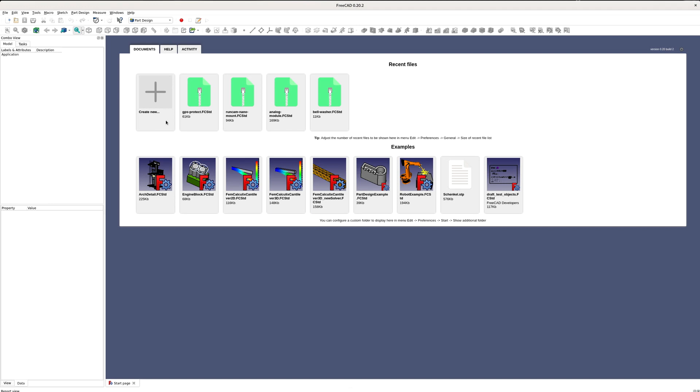Okay, so I'd like to share how to build 3D models using software like FreeCAD. I may not be following the proper way of building a model, but I'm able to build models. Okay. All right. So yeah, this is the workspace, and this is where all the resources or components are being shown. Everything that you are creating, this is the area where it's being displayed.

So the first thing that I usually do is the drop down. By default, it will default to Part. You have to be in Part Design. I'm not familiar with other stuff here. I've only used Part Design and, where's the other one? I couldn't remember. Sketcher, I've used that. There's another one that I use. Draft, that's the other one that I was using, especially when making my own custom text. Okay, let's select Part Design.

This is what I usually click. We create part, and then the next one is we create the body, and then the sketch inside the body. Okay, and then you'll be presented here with the axis, and I normally pick this one, but you can pick anything based on the model that you are creating. All right, so earlier we measured the dimensions of the TX800 VTX, as well as the thickness of the bottom plate of the iFlight XLS 5.1 frame.

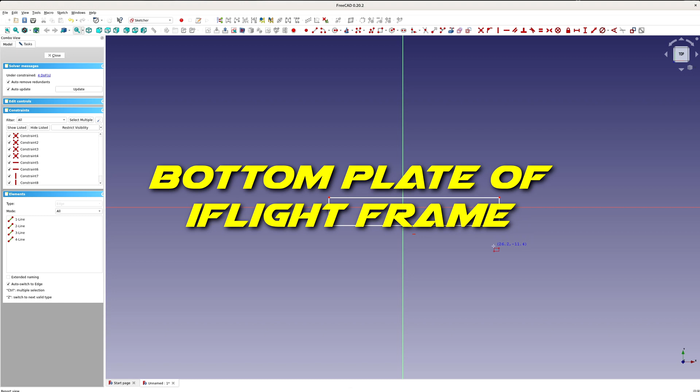And all right, so how I normally attack this is just random. I don't have any exact process. Whatever comes to my head, that's how I start. So I'm gonna build a rectangular hole. This is where the plate will be inserted, and the dimension of the plate is 2.5 millimeters. I'm remeasuring the thickness of the plate just to make sure I won't be wasting time. Yeah, it's 2.5 millimeters, and then the width of the plate, using my digital caliper, is 28.

Okay, so this is the inner hole, the inner surface. So again, like what I said, it's 2.5, so I'm gonna put 2.5 millimeters here, and then this one will be 28 millimeters. And then I'll zoom in on it, and most of the time I center it, by clicking the nodes outside and then the center, and then you click this.

And then the thickness of the TPU, I think 1 mm would be strong enough. Let's see, 1 millimeter. Yeah, I think that would be fine. I have samples here, this one is 2 millimeters. Maybe 1 millimeter is too thin. I'm currently holding a TPU washer that I made. It says 2 millimeters and it's thin. It's very light.

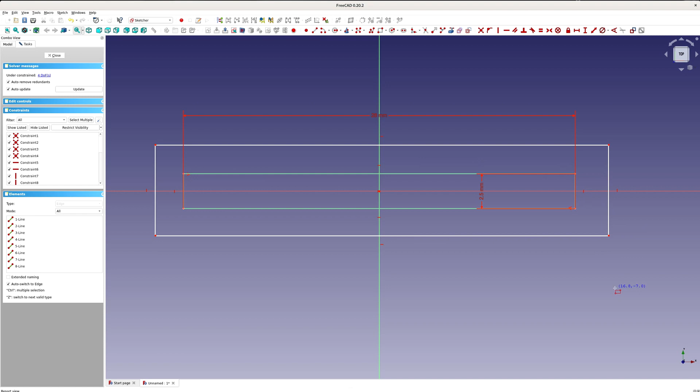I'm kind of worried about elasticity. I wanted to make it stretch because of something on the iFlight frame, which is why I was picking 1 millimeter. I can always use a heat blower to soften the TPU, and then I'll be able to insert this 28 millimeter clearance on a 30 millimeter wide plate. Okay, you know what, let's try 1.5 millimeters to make it a little stronger.

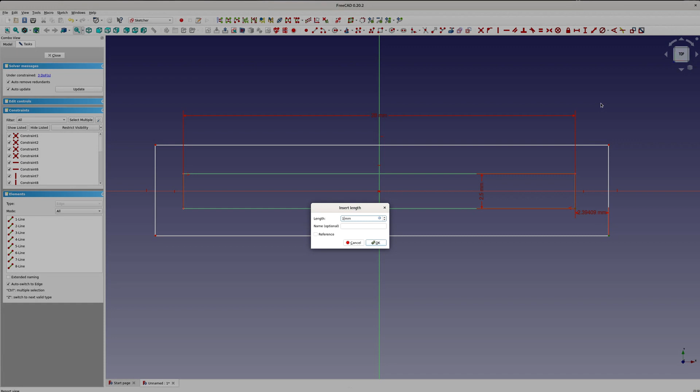So in order to put a 1.5 millimeter gap between these two, you select that node and that node, and then you click this. I'll put 1.5. And then this and this again for the bottom part. It's gonna be height 1.5. Okay, and then on the left side, you don't need to redo the height because we've already set up the height. What we need is the distance between these two lines here. So I'll click that and this. See the changes? Both nodes are now green. So I'm gonna select this and put 1.5.

Okay, what about the top part? Do we keep it as 1? This is where the VTX TX800 will actually be sitting. So 1 millimeter is, I guess, too thin. Maybe I'll put 2 millimeters. Let's see. I'm gonna look again at the washer. No, maybe 2.5. I'm gonna put 2.5 millimeters with an infill of maybe 40%, so that way it's not solid. 2.5. All right. I think it's not thick enough, but it's okay.

So next, we are gonna close it, and then I'm gonna extrude it, and I'm gonna measure how much width I will use for the mount. Okay, where's the drone? Here.

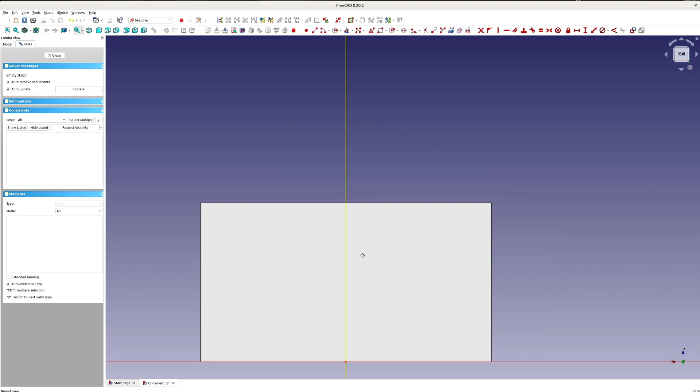So I'll click this. It's now selected, and we're going to create the sketch. I don't know if that's a bug. It vanishes. So what I usually do is close it, and then I double click this component here, sketch 1. All right. And then next we need to build the wall that I was saying.

What I'll be doing next is I'm going to measure the thickness of the TX800. And let's see. The thickness is around 6 millimeters. Okay, 6 millimeters. But before I do that, I will use this external geometry tool, and I'm gonna click some parts over here, the lines, the borders.

So that way, I'm telling the new object to adhere or attach or use the existing part or component. So I click that and I click this. You don't have to click everything, because what I'll be doing is I'm going to create a border, right? So I have to click this. So now you notice those 4 nodes, they're now clickable. If you don't do that, you won't be able to click the line.

Okay, I right click, and then next thing we need to do is to create a border. So yeah, I'm gonna use that rectangle tool here. Be careful, there are different choices there. I just picked the basic rectangle. So I hover the mouse and look at the green circle node, it changes color. When the color changes, it means your mouse pointer is on the proper position.

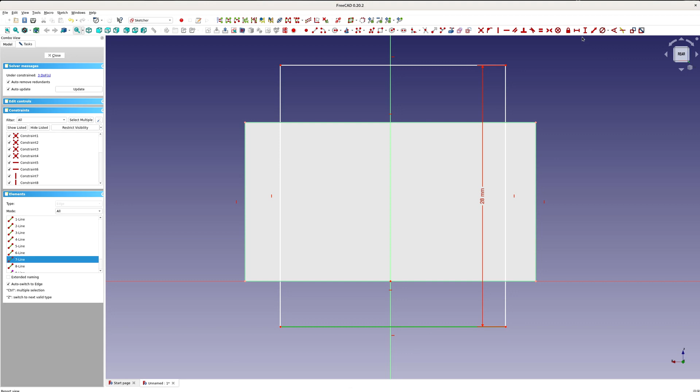We need to create a 28 by 28 square. Okay, and then that's the height. So you click this, see it's parallel, so you put 28. That's the height of the TX800 board, and this one should also be 28. Okay, and the next is to make this center. Click that again, see that green thing, click that, click this, and then click this to make it center. So 28 divided by 2, there you go. It's just math, right?

Okay, I don't know if this is wider than this. Maybe this is confusing me. No, I think they're the same width. I'm referring to this small rectangle area here. Next thing is we need to center this 28 in this to make it symmetrical or equal, so that the distance of this line here and this line are the same. You do that by doing some math. You click this and you click that, make sure it's green, then you click the height, and

1 second guys, sorry about that.

Alright guys, so the way to calculate this is by using math. Grab the width or the height or the dimension of the one that you're calculating, you divide it by 2, and then you minus it, and then grab the height of this, which I believe is 17 millimeters. We'll have to divide it by 2 again, and then the distance between these will become equal. There you go, it's 5.5. Yeah, so they're equal now.

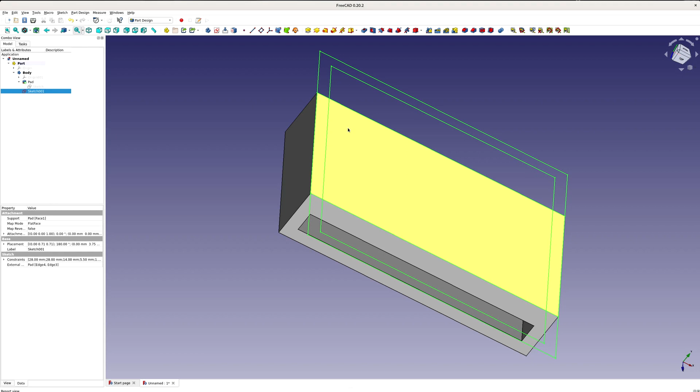Yeah, perfect. And so with these and these, the height should be 1.5. Okay, perfect. And then these and these, height 1.5. Okay, looks good to me. Now we can close it. And then let us measure again the thickness of the TX800. I think it's 6 millimeters, right? Yeah, let's see. Oh, my memory is so bad. But I remember it's 6 millimeters. Yeah, 6 millimeters. To be exact, it's 5.5, but I'll use 6 millimeters. So the padding we will use is 6 millimeters.

Oh, how come it didn't work? Why? It didn't work. Oh, because of that line. That's the culprit. So I forgot. If you have lines like this, it's bad. So we have to delete it. To delete it, this is the tool you use. Delete that. Delete that. Delete that. Delete that. Now, if we do this, I think it's still gonna fail.

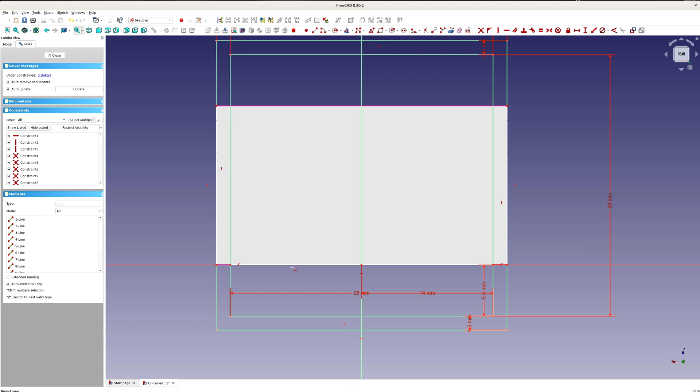You know what? Let's delete the lines that we added earlier. I knew we would have an issue. Oh, yeah, this one as well. We should delete that. All right, now it's all green, right? We deleted the first rectangle that I created. All right, we're gonna close now. The padding should work. Perfect. And then the height of the TX800 is 5.5, but we're gonna use 6, because sometimes with printers, we're not sure if it's correct or not.

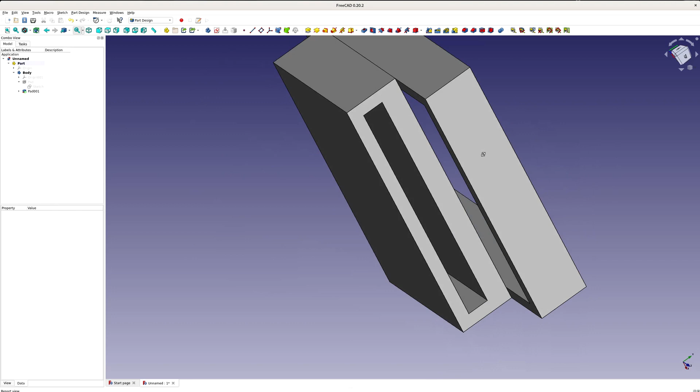Oh crap, I forgot one thing. Although it's not a problem, this can be used as an air intake. Yeah, I think that would be good. I'm gonna put an opening here later, so that the bottom part of the TX800 will get some air. I'll do that later.

So I was talking about putting a Crossfire Nano support here. This is what I'm thinking of doing. I'm gonna measure the thickness of the Nano RX, the Crossfire Nano RX. I'll make 2 here, and then I'll insert it, or I'll just extend a rectangle over here from here to here, right? That will still allow me to insert the TX800 around this area.

When I do that, the TX800 will be protected by that section, right? You know what? I'll do it now because I know it's hard to describe. But first, I'm gonna measure the width of the TBS Crossfire Nano RX. So the width is about 12 millimeters, and I'll make it 10, so that way the side of the RX Nano can still be secured properly by a zip tie. All right, let's do that.

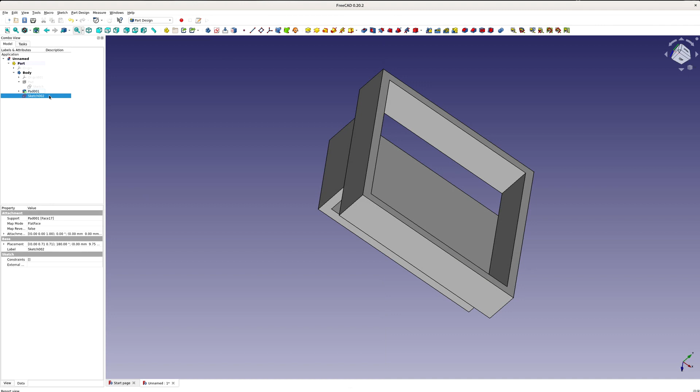I'm gonna click this part, and then we will create a new sketch. I think this is a bug in FreeCAD, which vanishes that thing, right? So we'll make use of this to set this as a geometry. What is this called again? External geometry. Create an edge link to an external geometry. Again, the width of the Crossfire Nano RX is 12 millimeters. I'm just going to make it 10 millimeters. So from there up to right here.

And then that's now connected to this line. So even if I drag it somewhere, it wouldn't go out. It's just gonna keep moving in that direction, stuck or connected. Like I said, the width is 12, but I'm gonna use 10 millimeters, and the center of that would be 5. 10 divided by 2 is 5. I just want to center this rectangle, so we'll put 5. This is where we will put the Crossfire Nano RX.

Later, once we print it, I'm going to put hot glue here, or most likely the other one. Let's see. Oh, this is not E6000 anymore. It's Gorilla Fabric Glue, but it's still okay. This is also strong. It's as strong as E6000. That would be good enough.

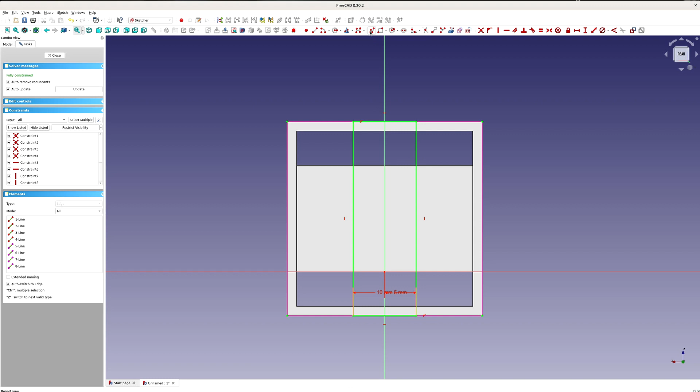I'm gonna make some geometry here, and then we'll use a different tool this time. We're going to use this one instead, because I want to create a non-rectangular shape, which is, I think it's called trapezoid. I couldn't remember anymore if it's trapezoid or rhomboid. I think it's trapezoid. So how come I cannot, what's going on? Did I click it? Oh, I did not click this button.

So first I'm gonna start right there. I'm gonna click, single click. See, it's color yellow, right? Single click, and then this. Watch it. This is currently diagonal, right? But I'm gonna slowly make it parallel to the line, and you'll see a symbol will show up. There you go. See that thing? It is telling us that it's now parallel to the other line on the left. So I'll click that there, and then click this again, and then I'm gonna close the gap to make it a perfect trapezoid. All right.

Okay, so now I just right click outside of the object, so we can pick another tool. Maybe I should set this to size 10 as well. Let's set it to size 10. Okay, size 10, not bad. And then this is definitely not centered, right? See, we need to put some constraints. We can pick like angle between these two, and we will make this angle equal to that one. But for now, let's make it centered.

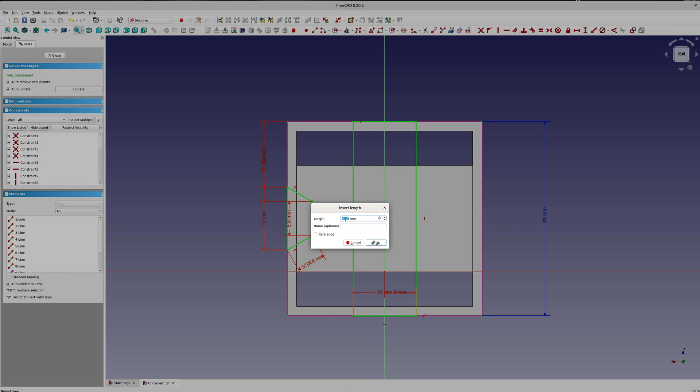So look what happens. I can just pick a length that I want, something that will look pleasing to my eyes. I think this length is good enough, so I'm gonna select that. This time we're going to use a different measuring tool, constraint distance. It's not parallel, it's not vertical, so you use this tool. So that would be 4.57. I don't like odd looking numbers, so 4.5 would be okay. Yep, there you go. So we have built this one, right? And now we have a guide on how much we will set this on the new one that we will be adding.

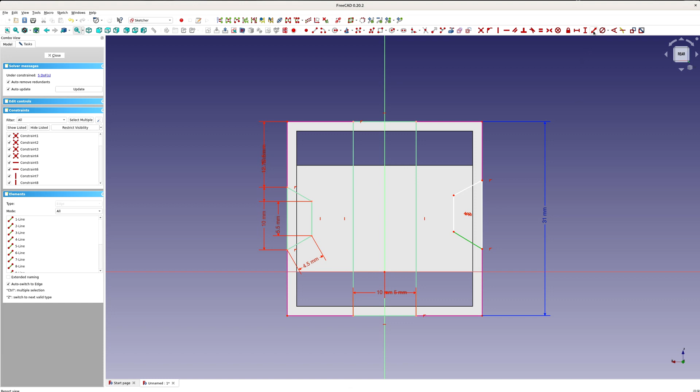So again, we'll click this tool, and then we'll create another trapezoid. You can just randomly click it. See? There you go. So now you're gonna ask me, Neil, this one is not parallel. How do you fix that? Sure, we can click this, select the line that you want this to become parallel to, and then this is the tool that you'll be using. There you go. Now it's parallel, right? And then next, you can pick any side that you want to fix. I'll fix this as 4.5. Okay.

And then now we can do the same stuff again, but I have another idea. I'm gonna teach you a different solution. You can select this. This one is locked now. I cannot move this anymore. I can, even if it's not gonna move. But this one, since it's still not constrained, I can still move it. So you can do it this way.

Select that and select this. Is it selected? The green? Yeah, I think it's selected. Oh, yeah, let's do it again. It's color orange, right? Or pink. So I'm gonna select that. Select this. Okay. Now you want to tell FreeCAD, hey, I want this to become like same level, same line. So there's a tool for that, and I think the tool is this one. Constrain horizontally. Bam. All right.

You can do the same thing for this. Before we do that, we can change this to 5.5. Let's change the length. 5.5. And then this. Let's do a horizontal constraint. Horizontal constraint. Okay. And then what else? I think this one is still not constrained because we can move it. Yeah, I was right. Okay. Let's do that. I'm gonna select this and then select this one, and we'll do another horizontal constraint. Bam, done.

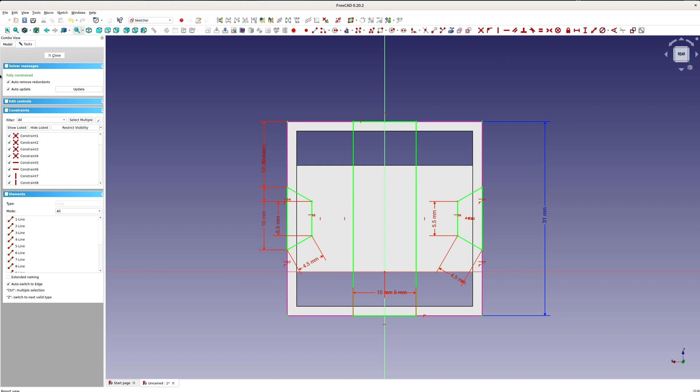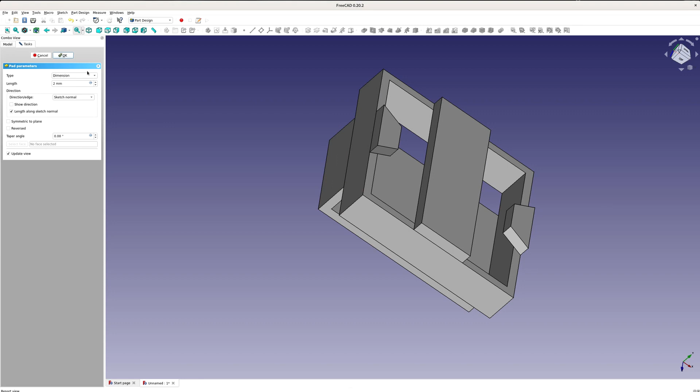All right. Now let's click close, and we are going to do a padding, and I am thinking of putting a padding of, I think 2 millimeters is good enough. So again, underneath this is where we will put the TX800. Yeah, perfect. Okay. And this is where we will put the glue, and then the Crossfire Nano RX. And then after we've glued it, we are going to put 2 zip ties right here to make it secure. And what else? Maybe I can extend this and then extend it there. No, it's just gonna add weight. All right, I think that's good enough.

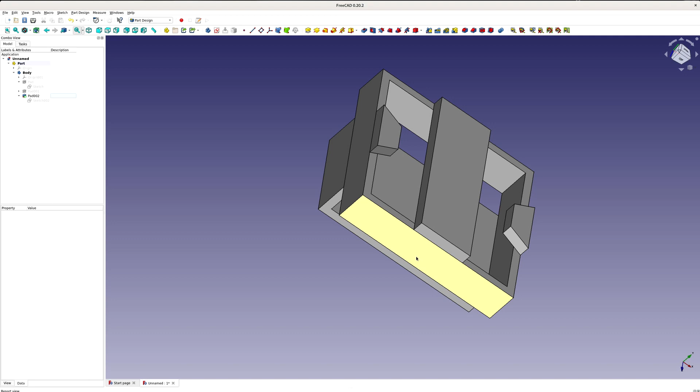All right, so what's next? Looking at the VTX now, there are 2 connectors. We have to make 2 openings for these 2 connectors. One is for the UFL, and the other one is for the JST. So we have to put a hole here and right here. Right here, okay? So let's see, it's somewhere at the bottom. I'm gonna use my caliper again.

The width that I must put for the connector is 9 millimeters. Okay, I'm gonna measure the real JST connector because I'm not sure if 9 millimeters is enough. Okay, let's see. Oh, the JST connector is just 7 millimeters wide. So 9 would be perfect. 9 millimeters for the hole, okay? Where is it? And then for the height, I don't know if I should make a full one. I think it's okay. Yeah.

If I make an opening at the bottom, will it make it weak? Because this is 10 millimeters, right? Let's see the distance. That's 6 millimeters, yeah. And then I put 2, and then this, what's the size? That's about 1 millimeter from the top, right there. 1 millimeter, so I can make a hole right there. 9 millimeters. Okay. So this will be a little elevated, which is okay. You know what? Let's see how it's gonna look. I'm just worried about the strength, the durability of this TPU. I think I should not worry about it, quite honestly. Okay.

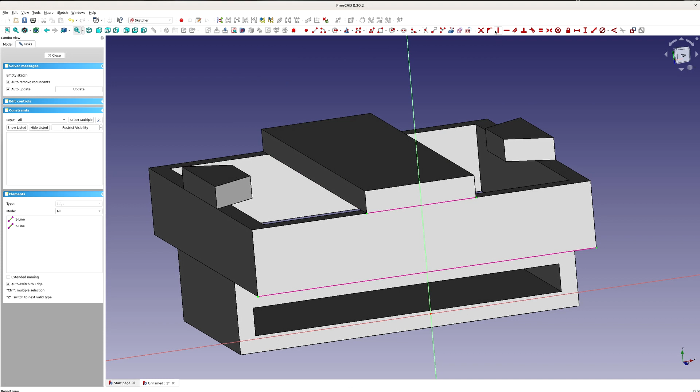I double click that, and then we want to add a hole there, a rectangular hole. So I'm gonna click this. I'm gonna click this. Okay, I'm sure it's hard to understand, right? So I'm gonna move it, and then let us measure the total height of the female JST connector. So right now it's showing me 4 millimeters. What about the real JST connector? Let's see. Oh, it's even shorter. It's 3. So 4 would be good enough. So let's make a 4 mm high hole. Where's that rectangle? Okay.

So let's click this top so it's facing us again, and then I said 4 mm, right? So click that and then change the size to 4. So I'm kind of worried that it might make it too thin. We'll see. We'll find out. I said 9, right? So that's the hole for the JST connector. So if I do it there, see that part over here? I don't know if it's gonna affect the strength. If I bring it down here, that makes this thing strong, and this one, I don't know. I said 1 mm from top. So we have to do that. 1 mm from top.

Okay, and then the bottom part. So if I do that, this is the only piece I'm worried about. This thing, yeah, this top. Making this thicker won't actually help.

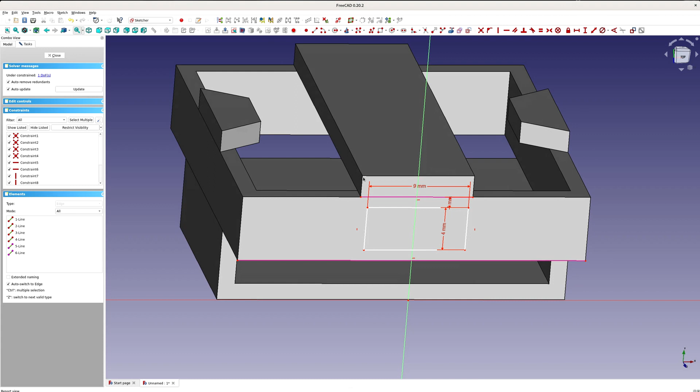And then this part, I'm not worried about the lower part. I don't care if this part breaks, that's normal. You know what we'll do? Let's add a part here so it will make it a little strong. This will add support for this area. Yeah, this part. Okay, let's do that.

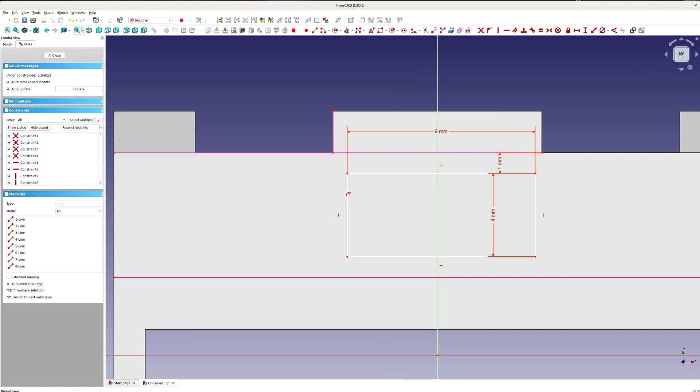So I'm going to use this tool again. We'll click that, we'll click this, and then click top so it's flat, and then we will zoom in and make use of this tool. Okay, I'm clicking the corner, and then corner here, and then I'm gonna pick some distance. Maybe this is just 3 mm, and then close it.

All right, let's see. So, oh, you know what? We can't do that because here I want a pad, but this one I want... what's this tool called? Oh, it's not shown. So let's undo this, Control Z.

Yeah, okay, that's it, let's close it. We'll do it later, we'll make a hole first. So to make a hole, we will use this tool instead of this one, which is the padding. This one is making a pocket. Okay, that's it.

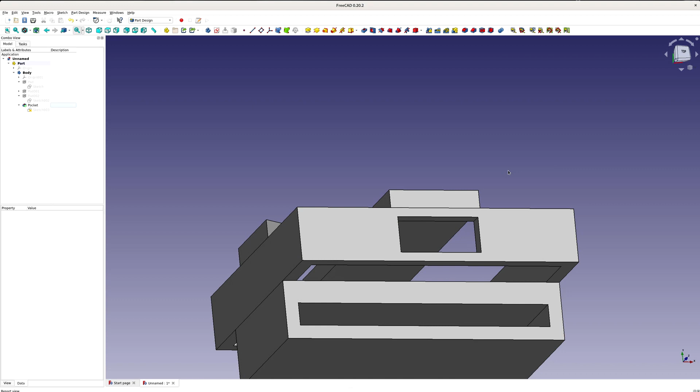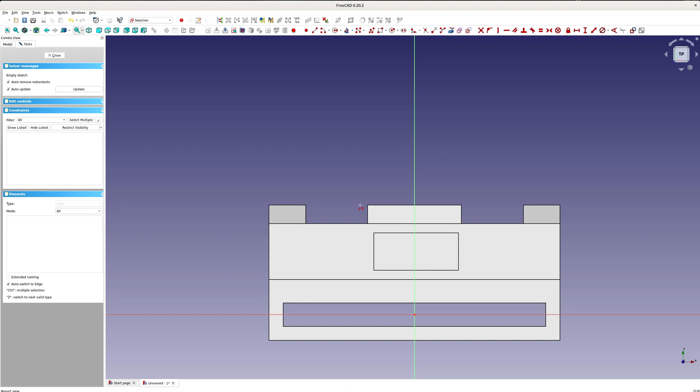Okay, now we are going to add support because this part is really weak, trust me. So we'll make it a little thicker. Let's click this, either this one or this, doesn't matter, and then we'll create a new sketch. Okay, a FreeCAD bug. Double click sketch 4, and then we will use this so we can select this thing and this thing, and then we'll zoom in, and we will use this tool to create a triangle. After we've created a triangle, we will pad it.

All right, so let's see the current length of this one. So I selected that line, and then I'm gonna select this. So that's about 3 millimeters. How wide is that? 3 millimeters. Doesn't matter, you know what, even if I put 4, this part, this area up to this area won't change a lot. So I'll just pick 3.

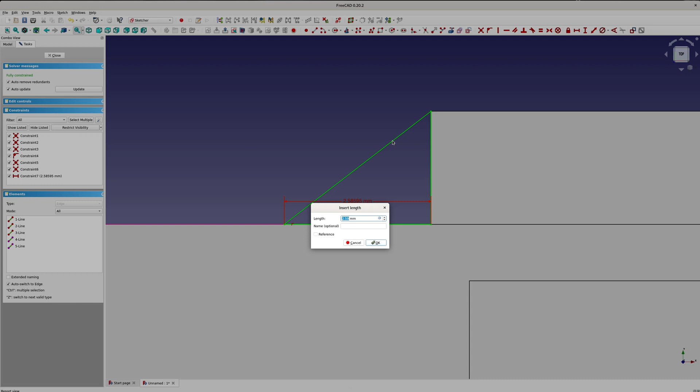Okay, let's do the other side. Let's do this again, the geometry, select. And then this tool will make a triangle. And then this one, right click on the area and then select the line and click this. 3. All right, we're done. Let's see, is it the same? Yeah, we're the same, it's the same.

So next, we'll have to do that on the other side as well. We will see. Oh no, we don't have to, because the other hole that we will make is small, it's a circle, it's for the UFL connector. So the next thing I need to do is to extend this, make a pad so that it's as thick as this one.

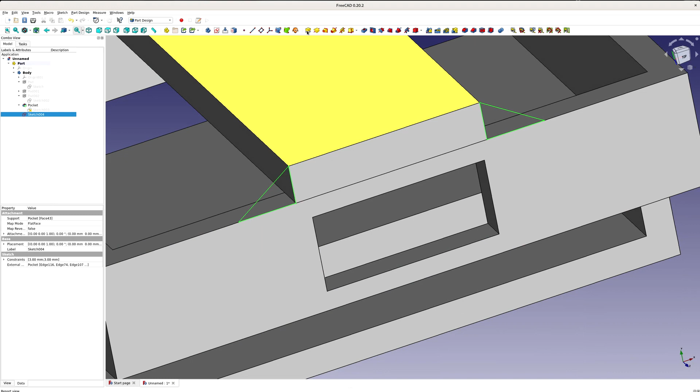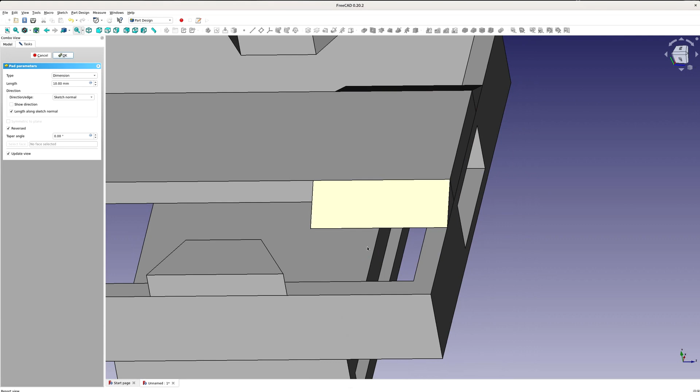Oh, why didn't it work? What happened? Oh, I have to reverse it because it's going towards here. So you have to click reverse. There you go. And then, so what's the width of this? What's the width of this? You can do that by showing this surface, right, and then changing the dimension to 'up to face'. When you click up to face, the next thing you need to do is just click this surface. See?

Perfect. Now, what we just did is we added support for this thin area, so that's a little stronger now. Okay, let's control save because I have not saved this work. I have not. Yeah, this is gonna be the first time saving a TX800 mount.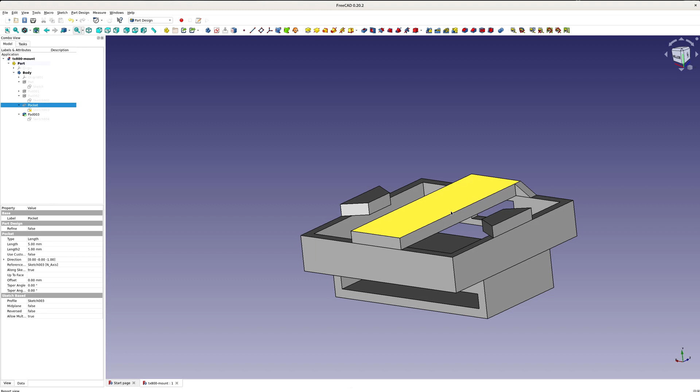Okay, now we'll make a hole for the UFL connector. So I'm gonna measure it again using my caliper. But where is the TX800? Okay, it's right here. So the top part from the bottom, from the top part of the UFL, is about 2 millimeters, and then opening at the bottom. Yeah, it's okay, doesn't matter. So where are we? We are going to make it here, we'll create a hole here. All right, oh, the width of the hole, that would be...

We can use 6 millimeters this time. Okay, so let's click this to create a new sketch. Close.

You know what? I should reach out to the FreeCAD developers and bring that up to them. What's going on here? Is this the other way? Yeah, okay, we will reverse it. I don't know why it did that.

So now let's click bottom, and then we will select this tool again. This and this, I think that's what we need. And then we will create - I don't know if we should create a circle this time because it's a circle. No, I'm gonna use a rectangle. And then I said the width is 6, right?

Yeah, 6. What about the height? The height would be 4, or let's do this - I said 2 millimeters from top.

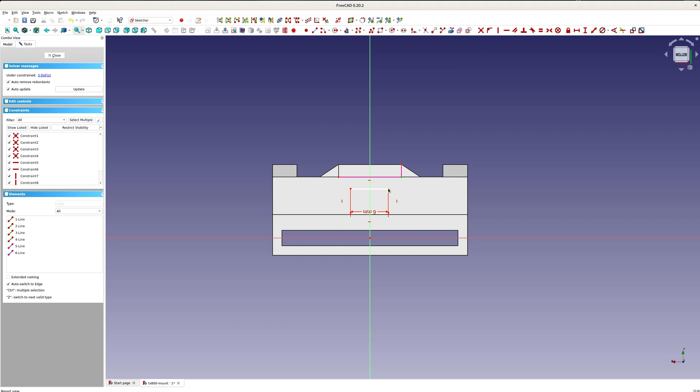Two. Oh my God, it looks like I didn't measure the center earlier. Did I? Yeah, I didn't measure, damn it. See, I forgot, it's not centered. Jeez, damn it, see? Oh my God. I'll fix it later, I forgot about that.

Okay, yeah, I noticed when I was doing this. Oh, my mouse is annoying. So 6 divided by 2 is 3. Okay, that guy is centered, and this one is 2. And then...

I think it's okay, so we can make it wider. Yeah, because we're just making a hole. I don't need to measure it because I don't want that thing left there, so we're going to put a cavity as well. But this is centered now.

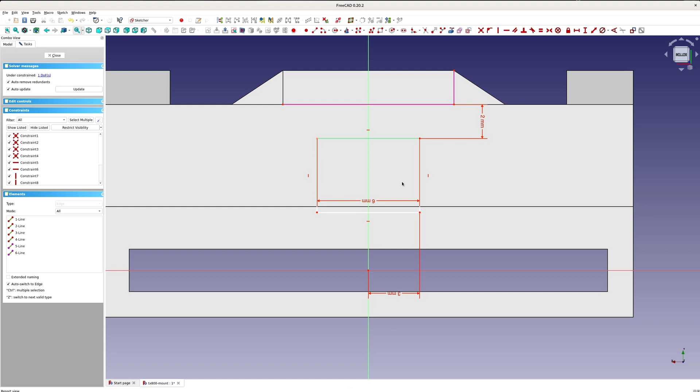That's 2 millimeters, okay, let's close it, and then you'll see what I'm trying to describe. There you go, that's what I was trying to describe. I don't need the bottom part - this is for the UFL.

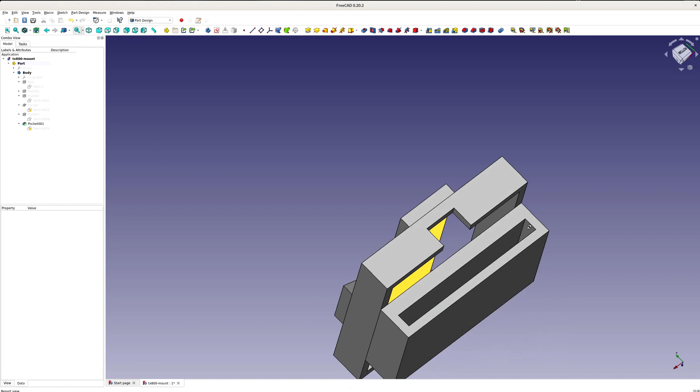Okay, I think we are done. Yeah, I think we're done. I'm gonna put some holes here because I think I'll have a very hard time inserting this part into the iFlight frame due to something - there's a protruding thing on the side, so I'm gonna make a hole.

Let's see. I think this is good enough. Yeah, it's gonna be hard to print though, there's tons of support. Yeah, maybe if I do it this way.

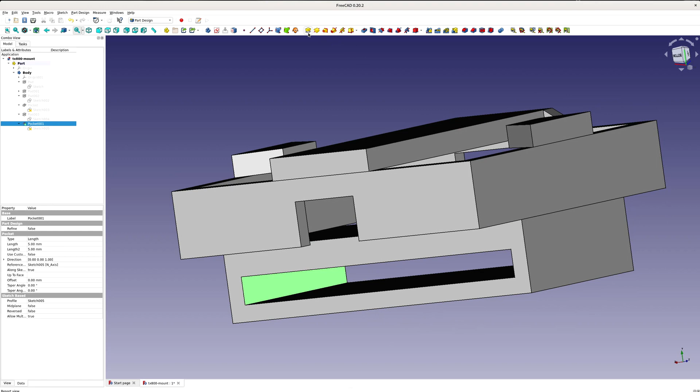You know what, let's build the hole now. I'm gonna build a hole on this side, so I'm gonna click this. Gonna click this - where's that new create sketch? All right, that's that annoying bug.

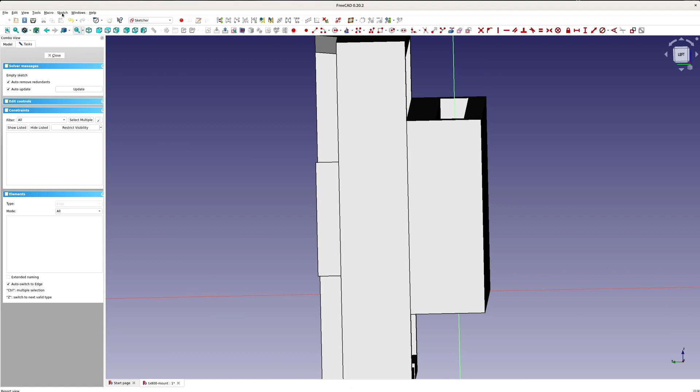Now it's like that, and you cannot see because it's the inside, right? In order to work on that thing, you'll have to click sketch and then view section. Look what happened, see? Now we have access to the inside. So let's make it flat by clicking left, and then let's rotate it.

I want to make a hole here. The width of this, if you remember, is 17, so we'll make use of this geometry again. And then we will create a rectangle.

All right, this area will become a cavity, an opening. So you don't want this part to be so thin that it will - what's that word - compromise the strength of the bottom part, the one where you will insert the bottom plate. So let's take a look at the distance of this from this. I don't know.

So that's about - oh, how come it's 0? Oh, because we rotated it. So that's what happens when you rotate and click the wrong tool. Let me do it again.

Click that, and then we will click this. I know it's this one, right, because we rotated it. So 3 millimeters, that's too thin. Maybe 5, let's see if 5 is strong enough. And think about severe crashes - yeah, 5 may be strong enough.

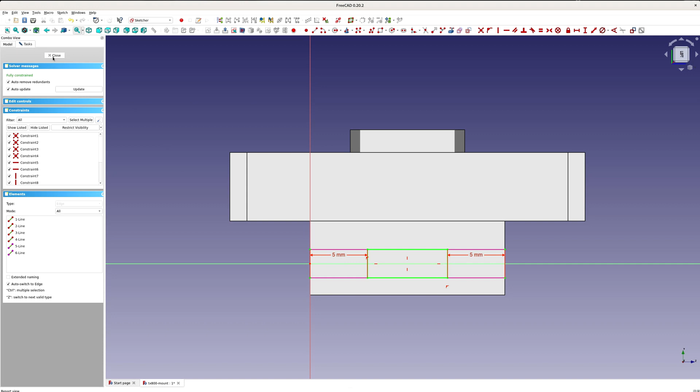Okay, so now we can make a hole there and here in one swing by doing this. We'll have to click 2 dimensions - 2 dimensions, right? So I think this one, the lower one, is for this one. So the width is 28. Let's try 30 here, let's put 30 or 35 just to make sure.

There you go, see this? Yep. Okay, I think we're done. Okay. Yeah, we're done.

We can just make it a little aesthetic, so let's click the corners and we'll make it aesthetically pleasing. Maybe 1.5 - oops, too much. 1.25, there you go. And then this one, I like this to be rounded.

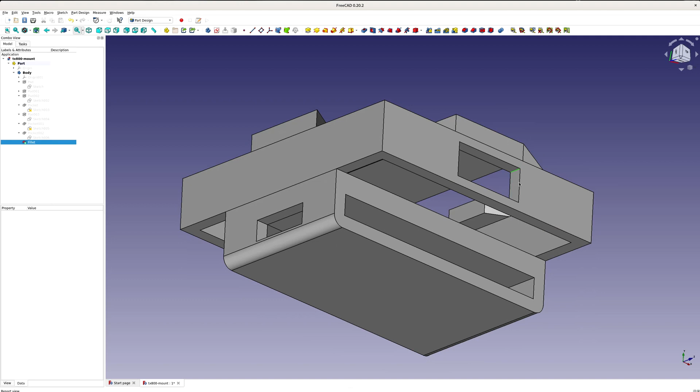Okay, I'm holding the control so that I can select more lines. Oops, what happened? Okay.

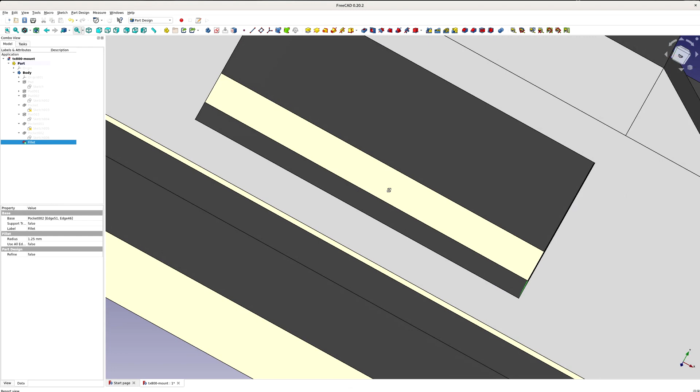And then zoom out. We've selected all four corners, and then we'll click this tool again, which is the fillet. Yeah, it makes it like that. Maybe 1.5. I think it's good. Yeah, it also made it even stronger there, right?

And then this part, I want this a little soft. Let's make it maybe 3. Yeah, that's good. Click save.

Okay, and then looking at the TX800, the corners are rounded, big rounded corners. So we'll put 4, I guess. Let's see.

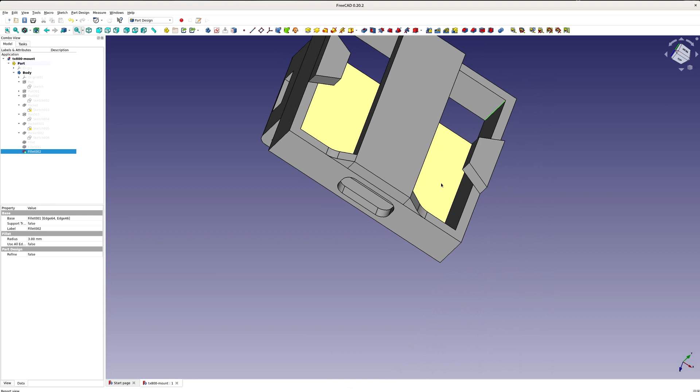Okay, zoom out. Rotate, hold the control key. Oh, did I click it? Oh, I clicked the wrong one. There you go. Okay, there you go.

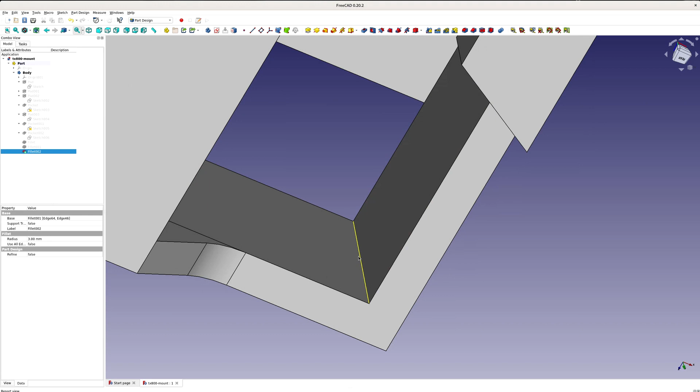Zoom in. I'm having a hard time clicking the line. Okay, zoom out and drag, and then last one here. Zoom in, hold the control key. Okay, zoom out, and then click this.

I think 4 would look great here. Yeah, 4. So that's the shape of the TX800. And especially it's just 1.5 millimeters, so it's elastic, it's TPU.

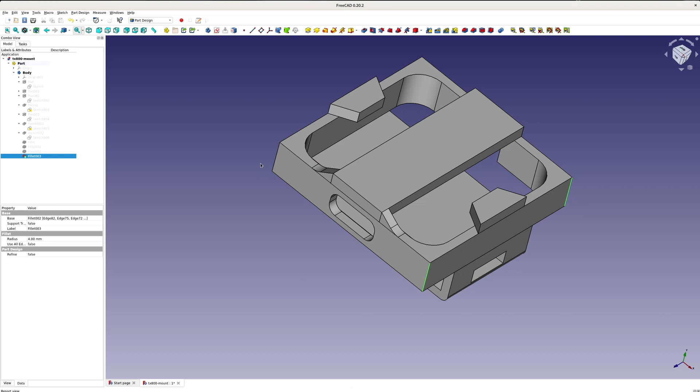Okay, and then corners, this looks ugly, so we'll do the same thing, but I guess I'm gonna use 3 only, so it's not too thin.

Zoom in, and then fillet, put 3. There you go, that looks nice. Yeah, that makes it still strong.

It's thick. Yeah, what if we put 4? Let's see. I don't know. It will be less TPU filament that will be used. Okay, I'll use 4.

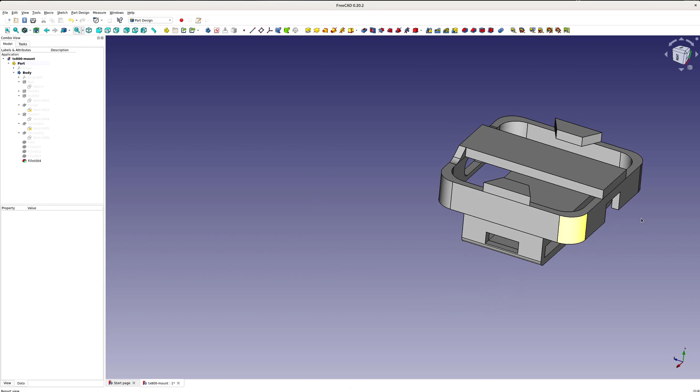Now let's go right here. Now this is for the UFL. We will put maybe 2 here. Zoom in.

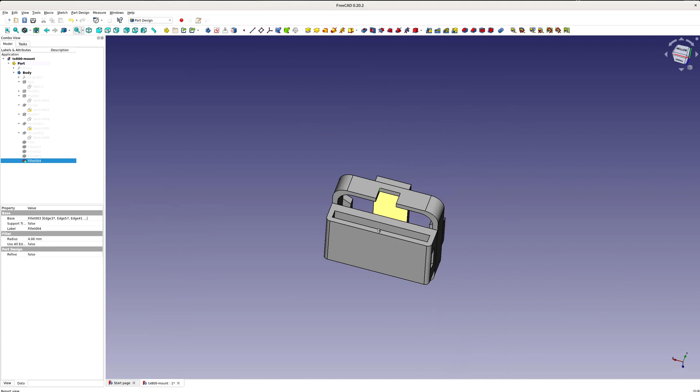Okay, zoom out. And then that thing again. Let's try 2. Yeah, looks good.

And then I hate sharp corners, so let's change this to 2 maybe. Oh, it didn't work. Oh, you don't have to select that. What about 1.5? 1.5. Yeah, looks nicer. Okay, and then

Maybe this. What about 2? 1.5. Right, there you go. It's looking nicer now.

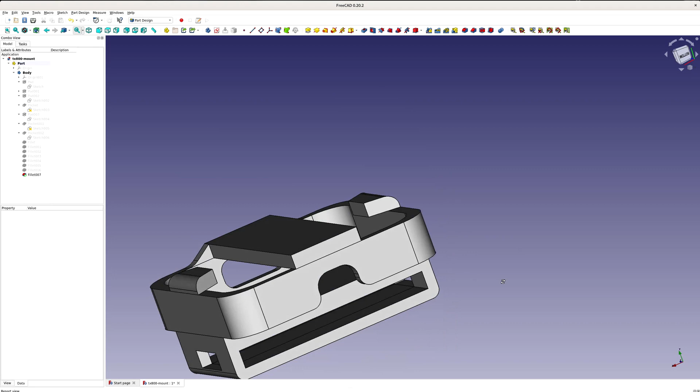Yeah, I think we're good. I think we're done.

Okay, so again, we will put the glue here, and then we will mount the crossfire here, and then what's next? Zip tie. And what else?

The VTX would be secured. I don't know if we have to. You know what? The TX800 will be secured because of this part. Yeah, plus this 2 here. It will prevent it from flying.

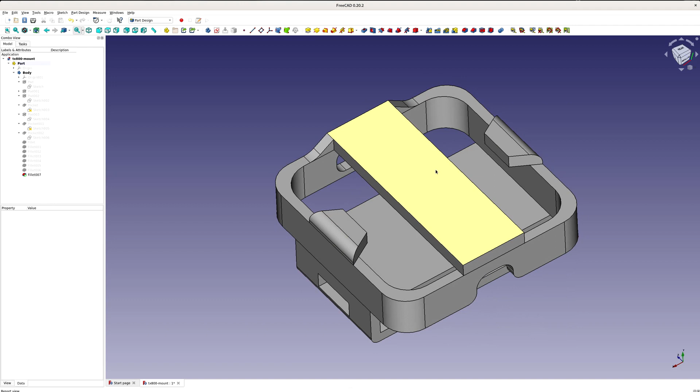Yeah, I'm pretty sure. If I'm anal, you know what I'm gonna do? I can put glue here on this yellow part. That won't fly anymore for sure. Yeah, I can do that as well.

Yeah, I think it looks great. Maybe.

This, do we need? I don't know. You know what? No, we don't. It's just a waste of TPU. We're just adding space. If I add this to here, no, it's not a good idea.

I think we're good. Oh, let's press Control S. All right, perfect. Yeah, I really like it.

Do you guys see anything? Oh, what's that hole? Oh, just for me to be able to, because of that thing, I think it's for the 30-30 holes. That's why there's a protruding thing in that iFlight plate. Yeah, this will just allow me to be able to extend this part.

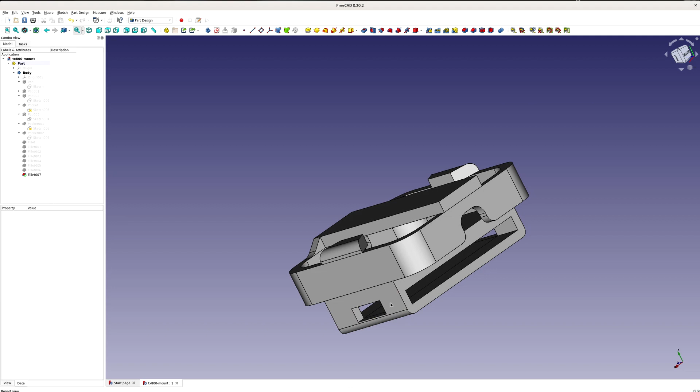Yes, or stretch, the proper word is stretch. Yeah, I'll do that. All right, guys.

What the next thing that we need to do is we need to save and then press Control A, and then we will export this as an STL file.

Oh, it's already in STL. And then I'm gonna put TX800 mount STL. Yeah, those are all the things that I was working on.

All right, save. That's done, it's already saved.

Okay, the next software that we need to use is Cura or Cura. All right, guys, let's start Cura.

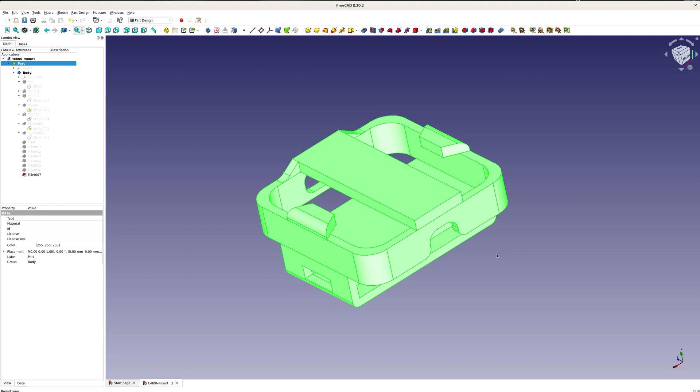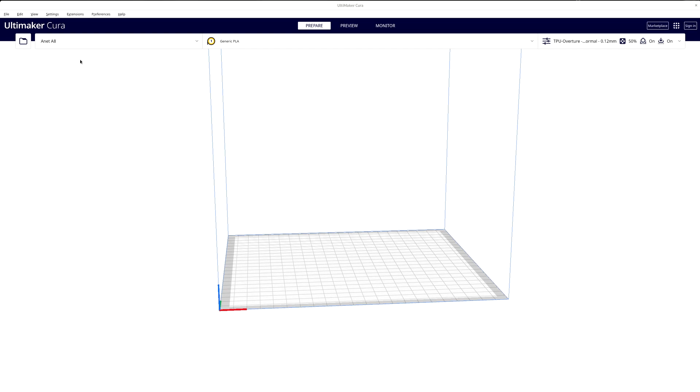All right, guys, we are now going to generate a file that is going to be compatible with our 3D printers. And the tool I use is called Ultimaker Cura, or Cura. And if you remember, I created or exported the mount that I built in FreeCAD as an STL file.

And yeah, this is it. Okay, so that's the mount. I'm just rotating it. Okay.

And now you have to think about, like, when you print models, you have to think in such a way that if I mount it this way, if I print it this way, will it be strong? So that's how you think. That's what you do before you print something.

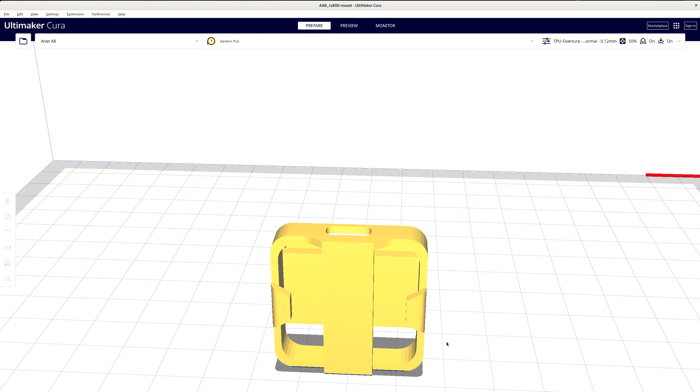And then also, if I put the object in this orientation, how much filament will I actually use? So right now, if you see red, that means Ultimaker Cura is going to add support to be able to print that section.

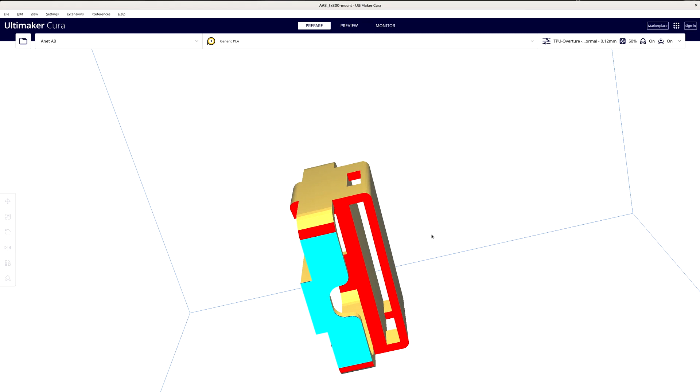So if I see how much I'm gonna be adding, that means I cannot print this way. I mean, I'll be able to print it this way. I'll have a very nice hole, which I like, but I will have to add support. You'll see it once I slice it. So that one will have an extra TPU because it will have to add support to be able to print

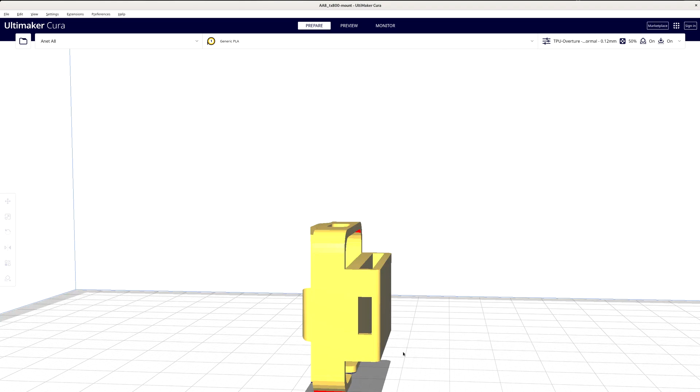this part. Yeah, so now this kind of orientation is really nice for the hole. It's gonna be clean. There won't be any support because the way the printer works is layer by layer. So you know what? I'm gonna slice it so you can see how it's gonna print it. So slicing it will tell you how a model will get printed, right? And this slider will tell you each layer.

See that part, that color cyan? It's the support in order to be able to print that area. If you don't, it's gonna sag and it won't print properly. That's why you have to do it. There are certain angles that you don't need support. So that's what's called slicing.

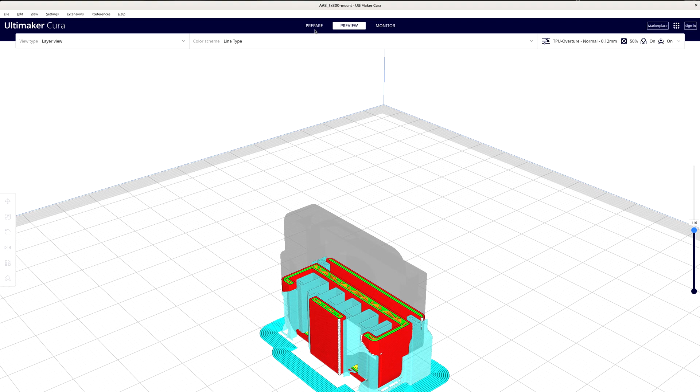All right, so how many grams will I be wasting if I do this kind of orientation? I'll be using 7 grams right there, and it'll take about an hour and 36 minutes. What if we change the orientation? Let's do that. So let's go back to prepare, and then click the model, click this, and then what if I rotate it?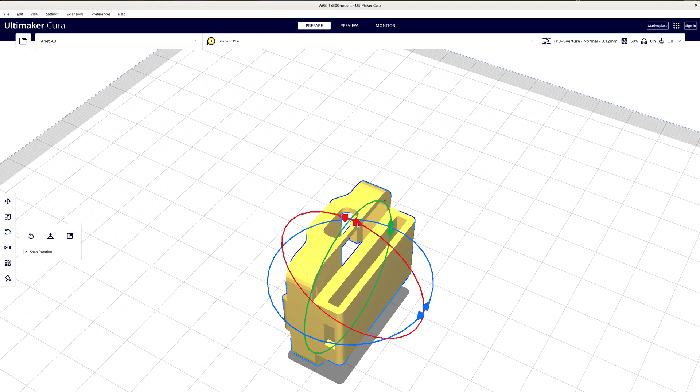What if I do this as the flat side facing the bed? This is called the bed. You can use the rotate tool, or the quickest way is by selecting this area. Select the surface, and then which part of the model you want to use as the surface facing the bed. I just click this. There you go.

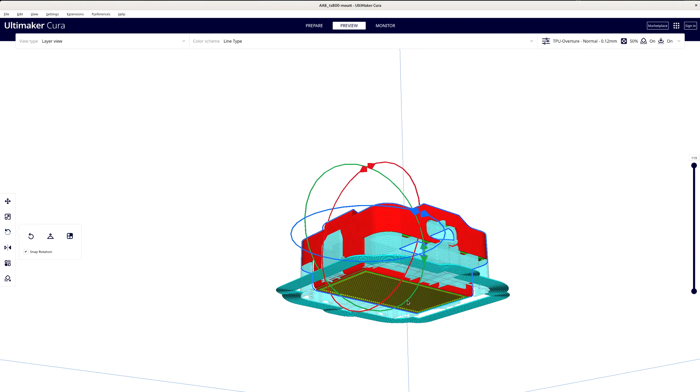Now if you do it this way, look what's gonna happen. I am worried about the support. I click preview. See? Look at that. So especially the hole where the bottom plate is going to enter, that will have tons of support. It's gonna be hard to clean. And I use pliers to pull this stuff.

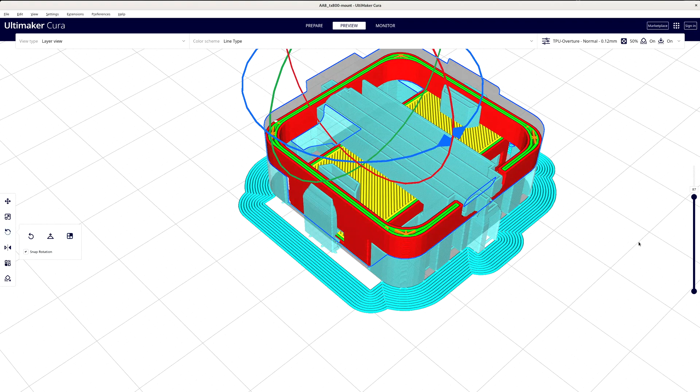Let me show you what I'm talking about. See? Oh, not that part yet. See, that's the support, the cyan, in order to print the upper part of the thing that touches the bottom plate. That's gonna be hard to remove, right? It's lesser grams, 1 gram less, 20 minutes shorter.

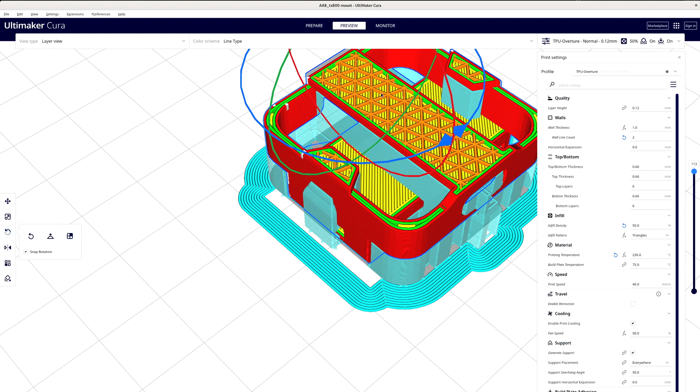Oh, the infill that I picked was what? Oh, 50%. I think it's okay. It's gonna be soft though. Let's see. See that part? That's 50% infill. If I pick 100%, you won't see any triangles. So you have to study before you create the printable format, which is the .gcode extension.

All right, so let's head back here. Maybe change the infill to, I'll pick 100. Did I type 100? Where's the 100? It's gone. Oh, here. I thought I typed 100. What happened? And then click slice again. You won't see the triangle anymore. Okay, let's move this up. See, there's no more triangle.

So having 100% infill is stronger than the previous infill that we used, which is 50%. Less infill means it's gonna be more stretchy or flexible. This one is gonna be stronger. And 7 grams. Oh, let's go back to prepare.

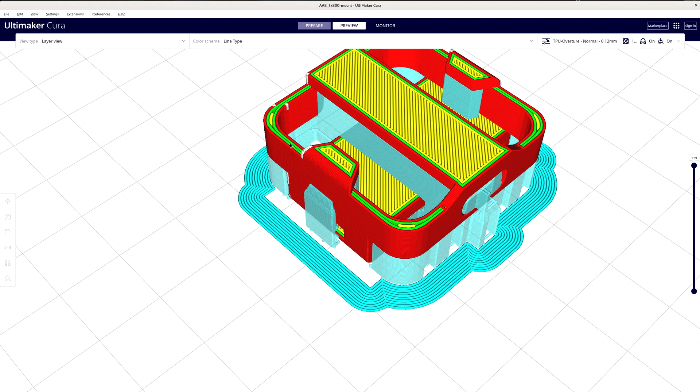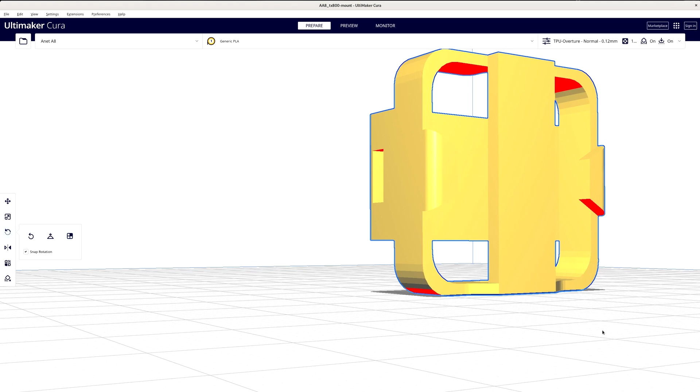And I'm kind of worried about the support that will be put here, and I don't want to clean that part. I want it clean. So select this and then select the surface. I'm gonna use this surface. So the inside part will be easy to remove. So I'm fine with this orientation. So maybe this is now gonna be 8 grams. Oh, it's still 7 grams.

Cool. Let's see preview. And then I'm rotating it so you can see. It's 100%. That's the support, the cyan, right there. I think I'm happy with this. Did I miss anything in the drawing? I don't think I missed anything.

So now let's confirm. Make sure what we selected here is correct. 100% infill, and then the brim. Printing temperature 230. Okay, that's good. So now, if I click save to removable, it will save it as a G code. Right now, it's pointing to the SD card.

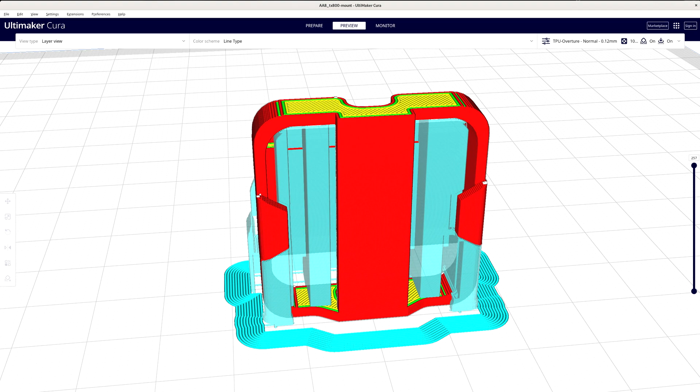You know what I'm gonna do? I'm gonna save to this, and let's see where it's going to get saved. Or no, you know what? I'm going to select removable. Oh wow, I think I broke it. I cannot click it anymore. I think it froze. Yeah, I think I broke it. That's crap.

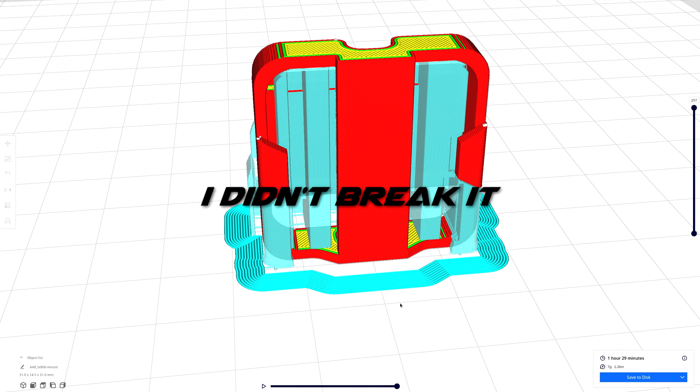But anyways, I'm gonna save this file as a G code, and then I'm gonna start printing it, and you'll see the final print later after an hour.